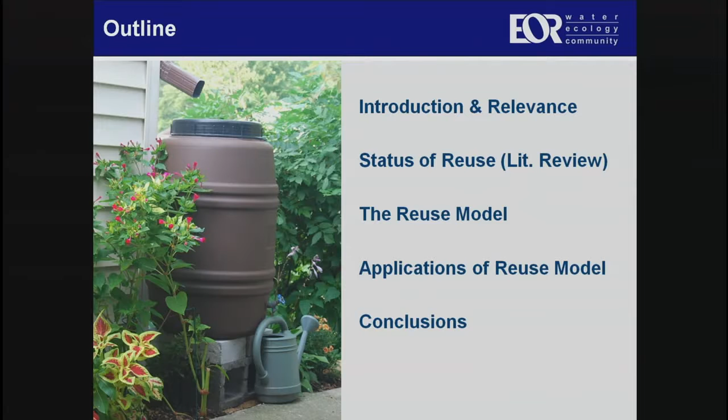Another part of that research grant was to develop the actual model, the tool, a spreadsheet model. It's kind of a lower end model, high end tool, I guess you could consider it. And then also look at some applications, both within the grant - we did some specific test sites just to check. Basically it was a way for us to debug and make sure the model is working as we want it to, plus to get some trends and ideas of what things work and what are some of the pressure points when you're trying to design a reuse system.

And then since then we have a couple other examples of actual projects that we've applied it to. And then some concluding remarks, and we should have plenty of time for questions.

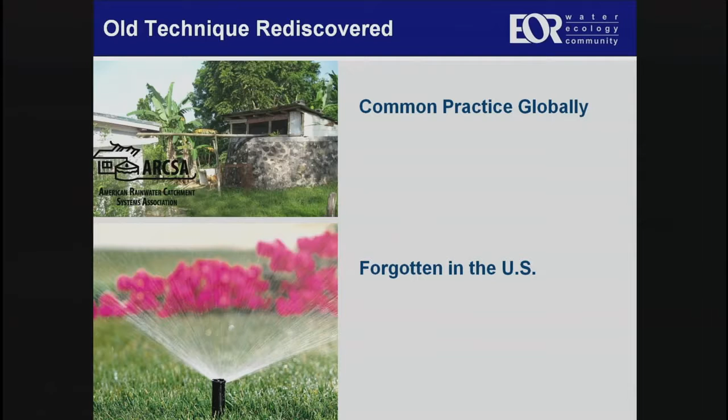So I think what's interesting to me, and worth noting, is this is somewhat of an old technique. If you've traveled internationally or been in any third world area, you'll realize that stormwater reuse is pretty prevalent, oftentimes a primary water source. So I'd look at it as an old technique rediscovered. A lot of the old farmhouses had rain barrels by their downspouts—they would conserve water. I think that's kind of interesting.

We've gotten to the point now where we've developed this potable water system that's relatively affordable, and we've reached this easy water at hand that we spend a lot of effort pumping out of the river or ground, treating it, piping it across town, putting it up into a water tower, and redistributing it. A lot of times it just ends up on our lawns or washing a car. The pendulum has swung so far to one side that we've forgotten we have other ways to access water—we've just turned to the idea that we've got this clean, high-quality potable water, so let's use that for everything. I think we're starting to step back and say maybe that's not the best way to handle our stormwater, both for the negatives and the positives of that water.

The other thing that excites me, and I think is very relevant especially today, is this convergence of a couple issues. First, stormwater standards are evolving—they're much more focused on the quantity, the volume of runoff, not just the rate of runoff. Old standards were often about just ramping down the rate, maybe with a wet pond where water could settle out some solids. Now our thinking on stormwater has evolved to realize that all that excess water created as we change land uses has its own impact—it carries pollutants plus more power and damage to our systems. So a lot of the new stormwater standards are looking more at volume control, not just rate control or the water quality ponds of the past.

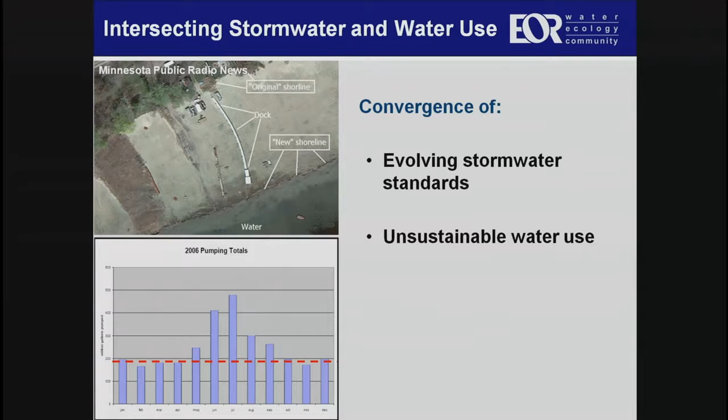And the predictions are, with some of the regional modeling that's been done, if we just keep along this path of continuing to pump so much groundwater and emphasizing groundwater withdrawals for potable water sources, we're on a trajectory where we're going to have some pretty severe shortages and problems show up. So part of the brainchild of this whole approach was to say, where can we irrigate with stormwater so that we're diminishing our potable water use, plus taking that water that would have normally run off downstream and been expensive to treat, and instead keeping it more at the source where it can have a dual benefit. That's the simple approach to it.

So I wanted to stop briefly and talk about what was the driver behind this and us pushing to get this research grant. It was this idea that these new volume control standards are coming online, which is a very important new approach, but there are sites that are difficult—if you have tight soils, contaminated soils, or shallow bedrock, doing volume control can be fairly challenging. What we're finding is this is actually a new tool in that stormwater toolbox. If you can use reuse, that's another way of taking stormwater out of the budget, even if you don't have infiltration as your primary way of handling the water.

So I think that's a need for the tool. Similar to talking to Cliff Aichinger before, the thing we were running into is we have some communities like Inver Grove Heights, a community we work with that has very aggressive low impact design standards—a very high bar set in terms of what kind of volume control has to be met for every new development that goes in. And we started having people come to us and say, buying our irrigation water is getting to be very expensive. What if we want to use some of our stormwater for irrigation? We want to use that as our BMP for all these high stormwater standards you have.

And our first reaction was, well, that sounds great. Yeah, I think that's a good idea, that sounds valid. But as we got back to the office and debated it, we could come up with all these scenarios of, well, we just had a rain, so how much water really gets used up in this? There's this idea that it's going to vary through time, and there are some limitations to the system—it's not infinite, even though it's good in concept. It also has its limitations in how you would actually apply it.

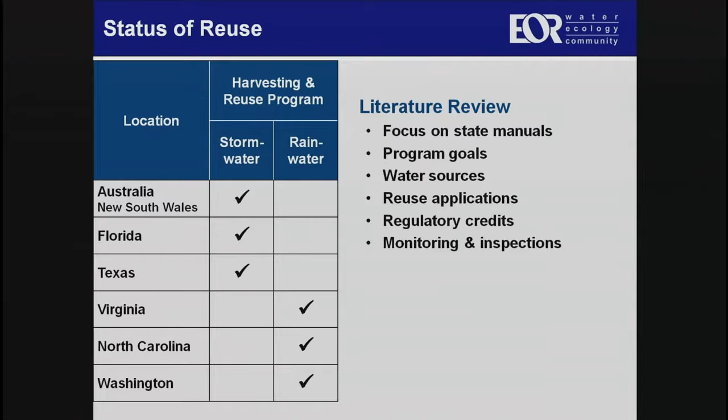What we found, at least in 2011, is there weren't too many regulatory programs. Virginia and North Carolina had some sort of volume-based credits. Virginia and Florida even looked towards the nutrient benefits of reusing stormwater and the phosphorus reduction. Some other states, like Texas, gave financial incentives but didn't have a credit program in place. In Washington, similar to Minnesota, reuse is part of their BMP toolbox, so there isn't any well-defined regulatory credit system yet.

That's an area that's constantly developing, and Minnesota can really play a key role in the national scene. The last thing was operation, maintenance, monitoring, and inspection. Now we're getting into public health risks of taking stormwater that might be contaminated with metals, nutrients, bacteria, and applying it to a public space.

We were looking to see what other states have done in terms of how often you have to monitor water quality in these systems and how often you inspect them. I'll talk about this later, but really the leader in this field is Australia, and they have quite a lengthy document. A future project in Minnesota could apply that more into a cold climate stormwater management system, instead of their more water-conservation-focused arid climate approach.

Other things we looked at, giving us background information on how to develop the reuse tool and model we built, were things we were interested in. Climate is changing, precipitation patterns are changing in the summer. One issue with a reuse system is whether your rainfall event matches with your reuse. If you just use an annual precipitation amount, that's great, but maybe you're capturing all this rainwater and it's all going to overflow because when you need it, it's not in your storage system. So we were just looking at what the precipitation timing is.

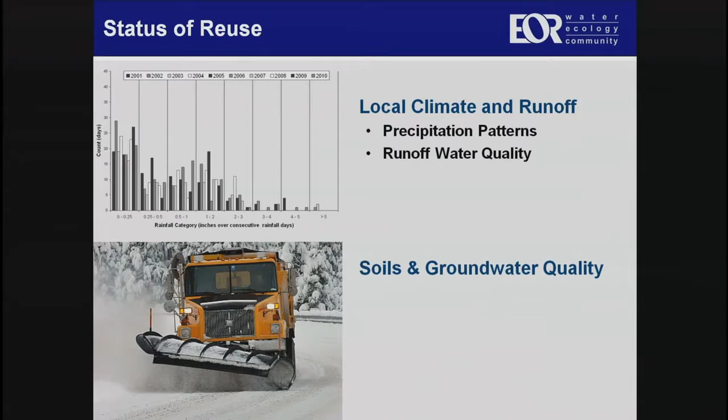Along the lines of water quality, since the goal is trying to put as much water on the landscape as you can, if it has poor water quality, what is the effect on soils and groundwater quality? In this part of the report we looked more specifically at the academic research. There's a lot on the East Coast looking at this, actually testing stormwater BMPs with high salt runoff and high nutrient runoff, and measuring concentrations in the groundwater table and also in the soils. Interestingly, there's retention in soils like you'd expect, and it is transported to the groundwater, but there were surprising results in that some systems had nutrients and contaminants flush away more quickly than expected. That's an area of research that is evolving and should be looked at again in the future to see what they're coming out with.

Another component we were looking at: given this, how much water can we put on the landscape? There are a lot of irrigation rules of thumb for how much water you should put on turf grasses based on water conservation, minimizing how little water you use. But since we're looking at this for stormwater management, we wanted to go the other end of the spectrum - what's the most you can put on without drowning your plants or causing lethal toxicities of metals and nutrients. So we looked at what's out there in terms of what plant and tree species are most tolerant to water logging and salt tolerance.

Something interesting research we found: there was a study that looked at 800 trees and shrubs and gave a relative ranking of water logging tolerance. That's included in the report with a citation for that, but it'd be interesting if people want to look at that.

Red maple, tamaracks, and silver maples popped up as what I would think are more common species here as being waterlogging tolerant, and then some of the turf grass cultivars are very waterlogging tolerant, like ryegrass and Kentucky bluegrass.

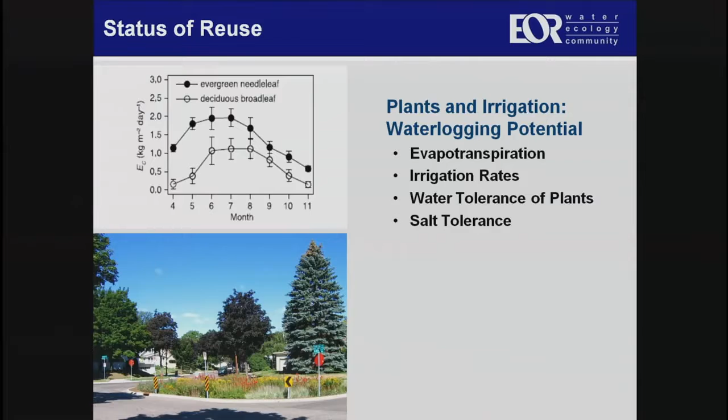And then a 2008 version of the Minnesota Stormwater Manual has pollutant tolerance of tree and plant species. So that's something, if you're looking at this in terms of what plants you might want to put in a reuse site if you're going to use captured stormwater for irrigation. And that was the focus of our study, this irrigation reuse.

That's a good source. And there's things that popped up with a high pollutant tolerance were poplars, sumacs, little blue stem. There's some MnDOT urban prairie seed mix, which makes sense, having a diverse set of plant species were tolerant.

And then the last thing, in terms of just the background information we were looking for, was this health and environmental risks. So how are people addressing high levels of bacteria that may be present in your stormwater and then applying it to a baseball or a soccer field or something where there'd be contact with humans.

And I mentioned Australia really had, I felt, the most developed kind of risk assessment framework for addressing this. And again, showed the cover. It's a long name of the document, but it's in our report, so you could find it again. It's this Australian Guidelines for Water Recycling. And they have managing health and environmental risks, with a phase 1 and a phase 2. They're very long documents, but the phase 2 is particular to stormwater harvesting and reuse.

And so on the right, I was just giving an example. The whole document is set up in terms of, you go through this checklist of things to look for in terms of managing the risks. And that's kind of how the whole document's set up.

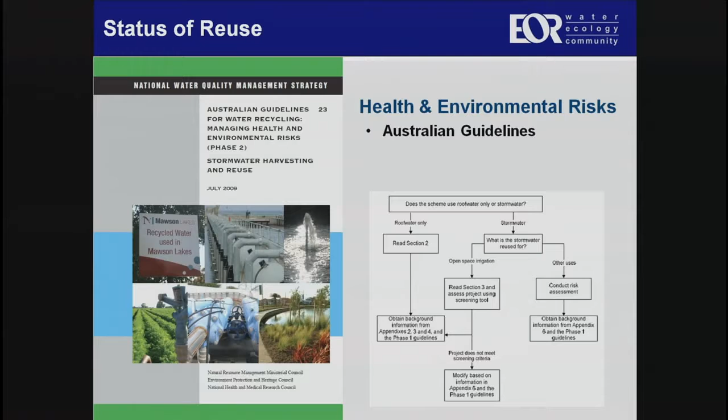It's great just to have a discussion, so this is great.

Okay, next I'll move into - since we knew we wanted to develop our own tool, we were looking at what was out there already. One, if there was a great tool, we didn't need to remake one, but also what were the pros and cons of each one, and what could we glean from each of the tools that are already out there. So I'll go through quickly some of these tools.

You could look them up, everything's available on the web, you could Google it. Florida has these stormwater rate efficiency volume curves. I was intrigued when I saw these because everything is normalized to an equivalent impervious area. So essentially their whole tool is developing the figure that you see on the screen. What this shows, on the bottom axis, is runoff volume of water - that's your watershed runoff.

This is inches over your equivalent impervious area, so it can be used on any site. The y-axis is your use rate, or reuse rate, of collected stormwater. The different lines represent the efficiency you're aiming for. So if you wanted to use 90% of collected stormwater, what rate of reuse would you need to collect all the runoff in your basin?

That was interesting. I liked the visual nature of it, that it's one figure you could use. But some disadvantages when we tried to apply it to Minnesota: it used an average runoff coefficient, so it's hard to use across different event sizes and different sites. It also depends on a supplementary source of water to maintain water in your pond.

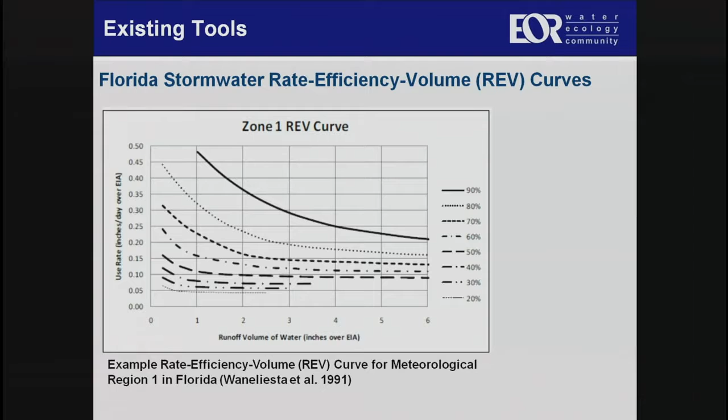So it doesn't look at any annual dynamics. This would just be a very broad, cursory tool for general sizing of the stormwater collection system you need to store stormwater before you can reuse it. But that's one of the tools out there.

If it's paused, maybe I need to press the button. Uh-oh, do I have to press it again? Oh, I see it turned off, so it must have been on. Okay, this works just as well. I'm going to move over a little bit.

The next one was out of Virginia. Now we're getting more into examples of spreadsheet-based and design tools. This one, of course you can't see anything, I apologize, but it's more for sizing cisterns for harvesting rainwater. This gets more at the storage component, not necessarily the reuse component, but actually it does factor in your reuse.

The box on the left is your inputs into this spreadsheet. It's an Excel spreadsheet, anybody can download this from the internet. You put in what location you are within Virginia, your roof area. This is roof water focused.

You answer different questions about how big your irrigation area is, how often you're going to irrigate, things like that. It also goes through uses like toilet flushing and helps you calculate those. On the right, it goes through the different storm events. It has some rainfall data it's using as assumptions and gives these little figures. The goal is to help calculate runoff reduction credit for their program in particular.

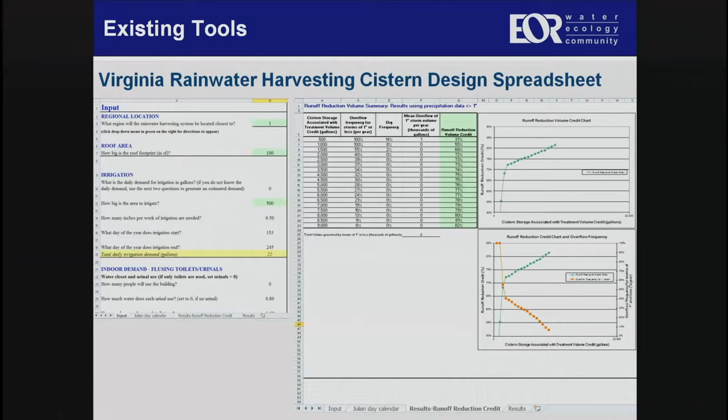The next one was out of California, and this tool was actually similar. I saw Carolina and thought California in my head. Thank you, Brett, that's why there's two of us here. North Carolina, and this one was actually a Windows-based program.

It's based on a similar spreadsheet type system where they have system design, so you can specify your rooftop area. This is focused on rooftop rainwater harvesting. It has some cost benefits in it, which was nice, so what is your cost of water, and sewered water, and the cost of a cistern, so you can get at how much money you're saving by reusing rainwater versus using potable water.

On another screen, what was nice is you can get more specific on your irrigation, so you can have different irrigation rates by month. I think you might even be able to get more specific than that. You can have this custom design with different water uses you can put in.

The output then just gives this total annual water savings, and it's very much focused on how much money you save. They have, I think, a nitrogen component, how much nitrogen is removed by harvesting that. But that's not as much a concern in Minnesota as phosphorus is.

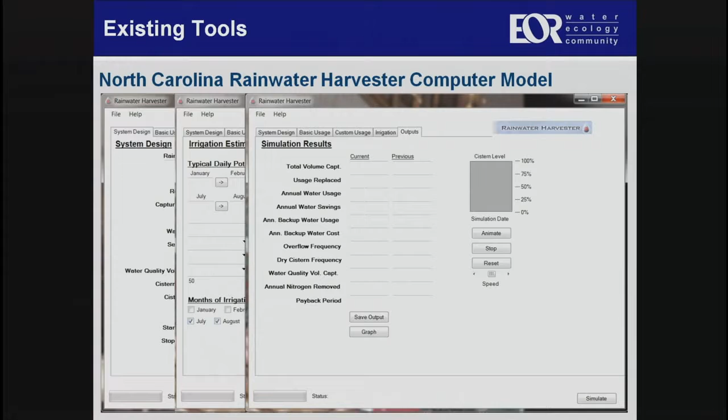So this system, you import a rainfall file, so you could make your own rainfall file and import it for Minnesota. They have some standard ones for North Carolina, so that was interesting, and they have that cost benefit. But it's a little hard to modify since it's a Windows-based program.

So that's a program that's out there. And then I started looking too in the academic community and trying to get at this question of this variable rainfall and when do these events happen, how frequent and how large your rainfall events are with the timing you need for irrigation. And so I ran across another kind of spreadsheet-based model, and it has a fancy name, Stochastic Reliability Estimation Tool.

Some university out east developed it, I didn't write it down. But the interesting thing is they kind of predict in the future what your precipitation might be based on past data, and they look at bootstrapping and all sorts of statistical estimation of rainfall. That would help you get at, you could put in the 2010 rainfall data and size your system appropriately for that year, but then using some sort of statistical prediction of rainfall, you might be able to get a more...

I'm not articulating that very clearly. But again, it's very complicated, and we couldn't incorporate something like that into our tool. But that's something that's out there. People are thinking about it.

This didn't work. Show this over here.

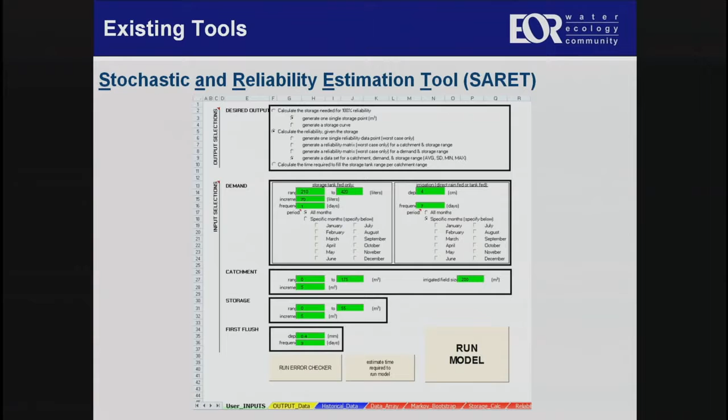But this one, the key components are more on your stormwater pond or cistern, how often is it empty. It's more on the efficiency, how much of your harvested stormwater can you reuse. So they have outputs like it's empty so many weeks of the year and things like that. It's more of a water balance tool and doesn't get into the water quality component, but that's out there as well.

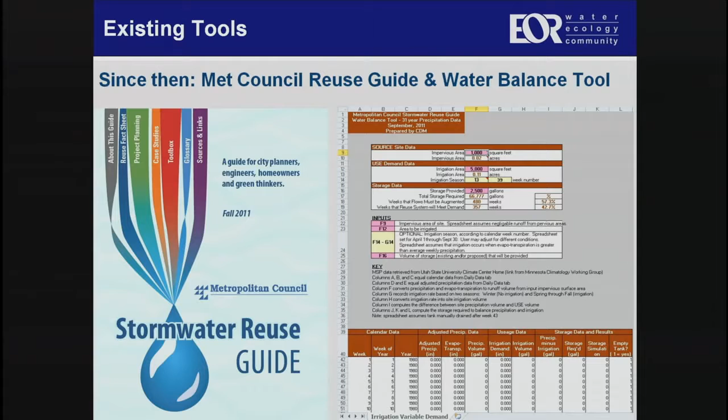And then, like I said, the minute you complete something, a new document or manual comes out. So EPA has this 2012 reuse guidelines that we never ended up looking at for this project, but that's out there. I think it summarizes a lot of the same things I've just told you about that are in all these other program manuals.

Okay, so let's get to the reuse model that we developed. We looked at all these previous tools and set out with what things we were interested in. What we wanted to build was a relatively simple design tool. We wanted anybody in this room to open it and have some sort of intuitive sense of how you might use it. Some of these tools and models are kind of complicated, but we liked the features of the ones that were more simple.

And then we wanted to be able to incorporate this timing of rainfall. So our model is based on actual precipitation data from the Minneapolis airport. We picked out 3 representative years, a dry, average, and wet year from the most recent data, which ended up being 2007, 2009, and 2011. We run it on a daily basis, and all of the components of the model are based on every individual day, calculating and looking at that rainfall.

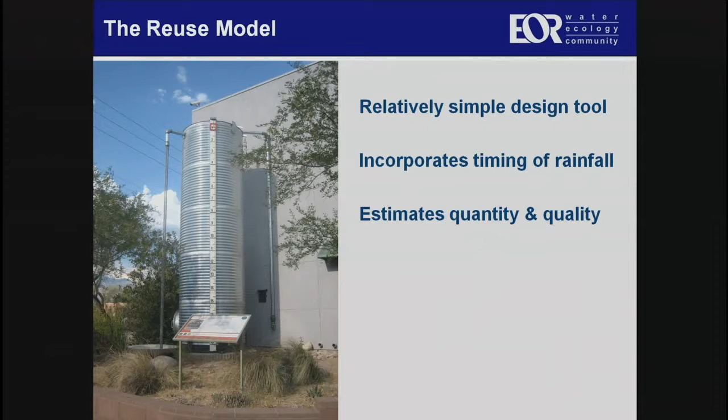It didn't like that. Maybe it's because I'm holding this. You just turned it off? Oh no, okay. Anyway, looking at previous rainfall, things like that.

And then what we thought was really new and unique about our tool is that we're incorporating these nutrient benefits, phosphorus in particular. There's a lot of phosphorus in our stormwater. We spend a lot of money trying to mitigate lakes that are too eutrophic, reducing phosphorus in our stormwater. So by collecting stormwater and reusing it for irrigation, we can put those nutrients on the landscape to be taken up by plants and soils. So what are the benefits we can get from that?

And then also there's an interesting side benefit of the fact that we have to store stormwater in some sort of pond or cistern, and we get sedimentation out of the water column of our particulate bound phosphorus as well. So we tried to incorporate some very general stormwater phosphorus sedimentation equations and a phosphorus mass balance into this tool, so that we can not only quantify the volume reduction benefits, but also phosphorus, which we're also very concerned with for stormwater.

And that's why I helped out on the tool, if you're wondering why. A scientist is on this project and not our engineers.

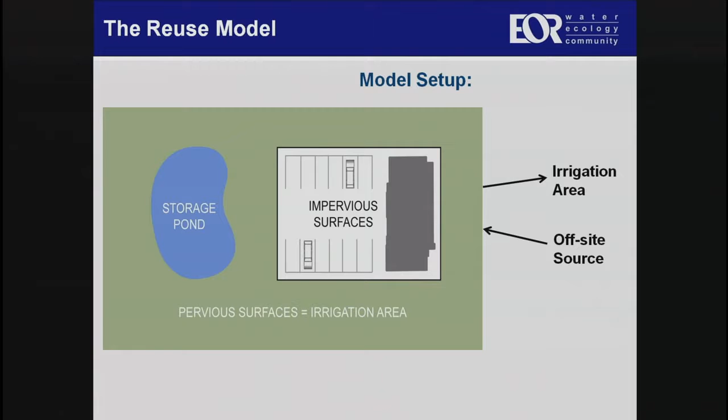And then we have all of our inputs in terms of irrigation area and where your watershed runoff is being generated kept separate, so you could use the model and assume everything's kind of insulated, meaning your watershed is generated from the same site that you're irrigating on. But also you could separate it if you're in a very urban, ultra-urban location. Maybe you're capturing stormwater somewhere else or from your site, but then piping it somewhere that needs more irrigation water, but they're actually hydrologically disconnected.

So the water budget, and this is the same in every tool we've come across, nothing new: you have your watershed runoff flow coming in, some sort of size of your basin with a maximum set, a variable storage component, and a sediment storage volume that you wouldn't actively pump below, so you have some standing volume for your phosphorus to sediment out. It can evaporate below that level, we can't prevent that. Then you have evaporation from the pond surface if it's a pond storage system, and an overflow component if, in big rain events, you exceed your storage size. And then, of course, what we visualized as our main output was this irrigation component.

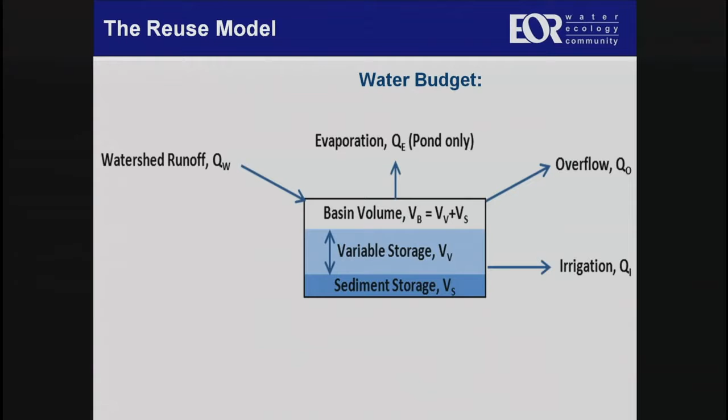The other portion then is a phosphorus mass balance that corresponds with the water balance. So we have our watershed load coming in, based on event mean concentrations of phosphorus in our rainfall events, which you can set as an input. We account for mixing residence time of the pond system. If you get back-to-back rainfall events, you're going to have much less sedimentation of your phosphorus, and more of it's just going to flush right out of your system, so we try to account for that. Eventually your sedimentation component is just what fraction of your phosphorus is sedimented out based on residence time and the size of your basin.

And so then you can have sediment storage, and again you have overflow. Some of it's just dissolved in your overflow, and you can keep track of that, and then how much is actually going onto your irrigation lawn.

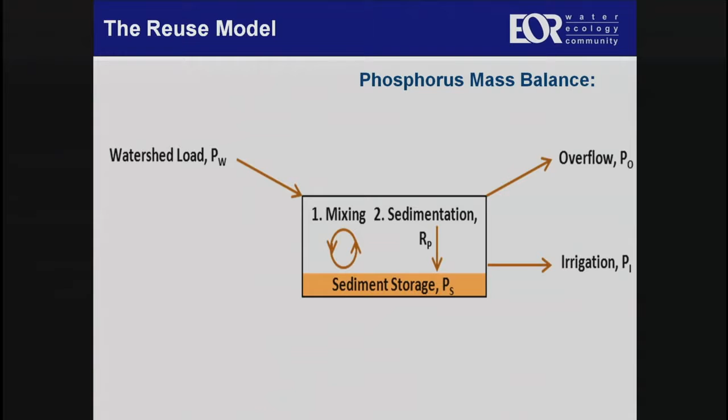So first you would start with your irrigation, and what is the area, what sort of lawn do you have that you can irrigate, however many square feet. And then how intensively do you want to irrigate? A rule of thumb for water conservation is 1.5 inches of irrigation per week for turf grass, and we assume you're going to irrigate every other day. These are just following these rules of thumb, and that's how our model is developed. So 1.5 inches per week at every other day is 1/2 inch, and that would be your input. You can change that in the model.

So maybe you want to get really aggressive and do 1 inch every other day and see how much we can put on. Maybe you have A soils, and it's just going to infiltrate really quickly. And then you can set, we have a finite growing season, so you can start your irrigation in May and end in September.

Some models can do it by day, I have it by month. We're always looking for what's the next version, something we could add. I was just realizing today that maybe you could have it more specific if you wanted to start on May 15th versus May 1st in terms of irrigation, which could make a big difference.

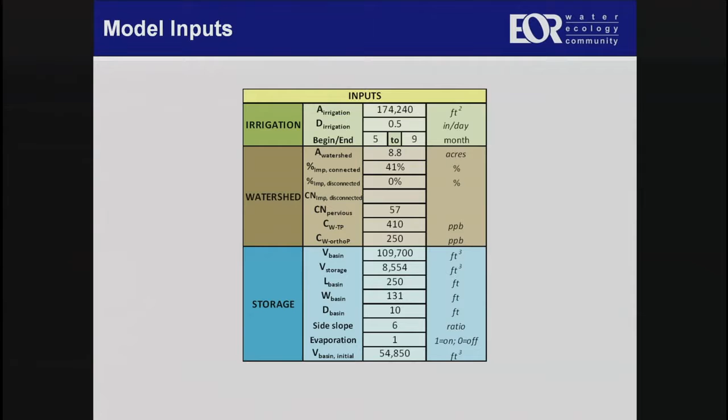To switch between a cistern and a pond in the model, you're essentially just turning evaporation on and off with a 1 or a 0. And then you set some sort of initial size of your basin. Our model runs one calendar year at a time, so you'd have to have some sort of starting volume. That might let you account for some snowmelt dynamics - if you know it's going to fill up from snowmelt, you'd start it full, or if you think it's going to be empty, you can start it empty.

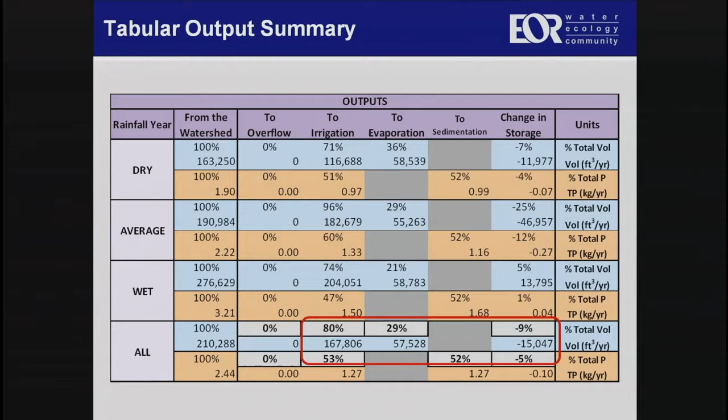So that's the summary screen, and that's also shown in the output as a bar graph so you can compare between the different years and the different sources. In each figure, the top one is in terms of volume and mass, and the bottom is a percent of the watershed total. Each of the colors is a different source.

The white in each one is a change in storage, you have evaporation in purple, irrigation in green, and sedimentation in orange. If you notice in these figures, this is a system that started empty and ended up full, so some of your totals are just being stored in the pond - that's why you get this kind of negative value. So it has the capability to let you know what's happening in your cistern or storage pond throughout that year.

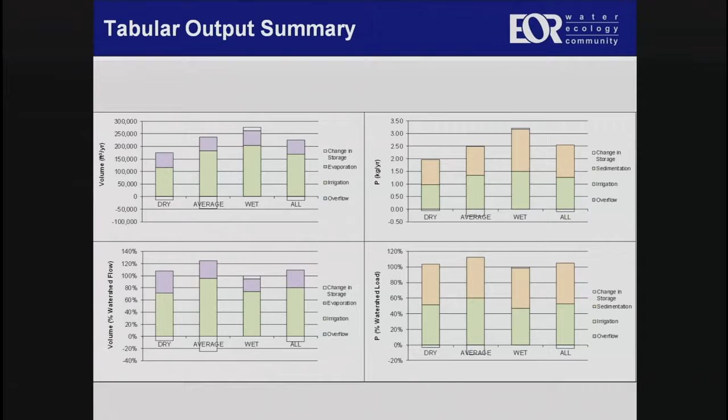You need to maintain some volume that looks like you have a pond there. So in terms of your rainfall and how you want to size it, we have these annual figures to show you the water level dynamics in the pond. What I'm showing here is on the x-axis of all these figures, it's the date, January 1st to December 31st. On the y-axis is the volume within your basin.

And the blue line shows you the total volume you have. There's a solid line at the top showing you relative to the maximum volume of your pond or cistern. And there's a dashed line near the bottom that is your sediment storage volume.

So you see that in this case, I think this example didn't have much watershed runoff. So we see we're losing volume through the year because we're not getting enough inputs. And the minute we start using the water for irrigation, we're emptying our pond and not getting refilled. So if you saw this system, maybe the pond's too big.

And then you can see that due to evaporation, we're going below that sediment storage volume, so that could have some consequences for the phosphorus component of this system.

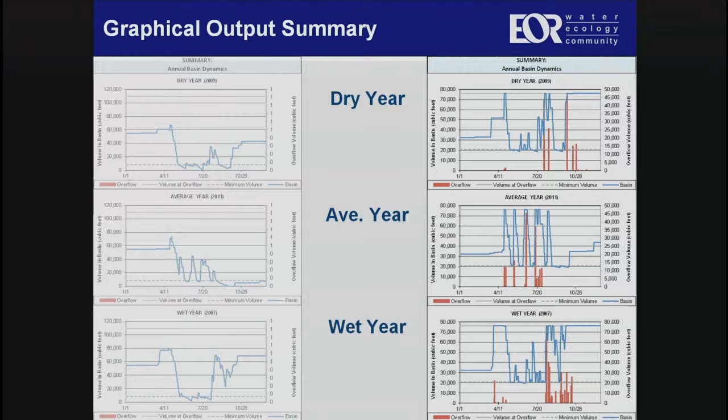So that was kind of our hope with some of these figures, is that it could be useful as a design tool, that you can make those decisions, and we're not making any assumptions for the person who's actually doing the designing. So this is actually the whole input-output spreadsheet in the model, and you can kind of see that they're all just kind of clumped together.

And with that, I'll pass it back to Brett, who'll go through some examples and talk about how this has worked.

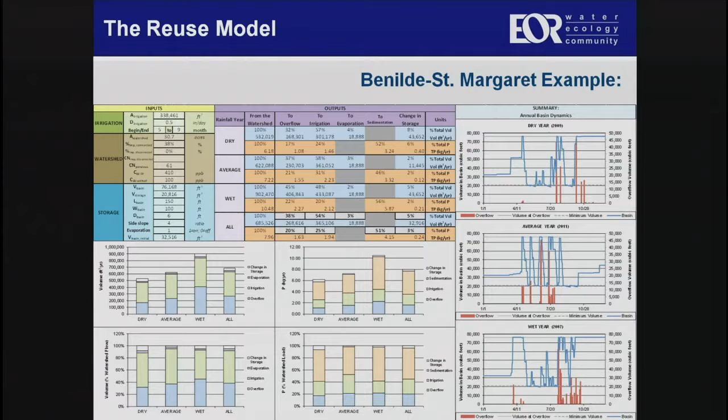As you can see, there was a lot of background to go in there, and thanks to Megan for doing a nice job of thinking of all those pieces. Particularly, I thought the accounting for evaporation, I kind of felt like, well, that seems like overkill. It's a small thing, but I'm glad we did, because as we got into it and looked at it, it can be up in that 15-20%. So it is enough of a variable in certain conditions that I'm glad that we had it accounted for.

So I guess at this point, I was going to change over and just talk about, as part of this original project, we had kind of 7 or 8 sites that we wanted to run the tool on. So I'm going to walk you through one of those sites, just to see how the tool was set up and how we saw it run and what kind of results you get off of a given site.

This was somewhat urban focused. One of our sites, though, was very suburban, a proposed new development. We had Ross Bittner on our technical advisory committee. He had a site, before he moved up here more in the metro area, or in the inner city, he was more in a suburban community, and he had given us a site that had been proposing to use. They had some very high standards to protect the lake, so they wanted to use reuse, and he talked about how much difficulty they had in terms of trying to come up with this kind of approach. He said this is the kind of tool that designers really need, because it really gets us at the point where everyone's comfortable.

This is what they're actually going to get as far as a performance out of their system. So I'll take you through these 8 sites kind of quickly, and then I'll cover 2 other sites that have been designed and built, or in the process of being built, based on this.

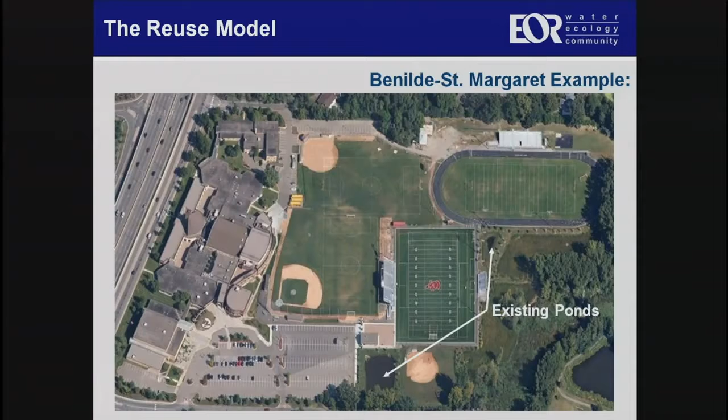I'd say they're fairly undersized by current standards, but at some point in the history they put in some little stormwater ponds. So we just said, well, what if you just took the existing stormwater ponds and at least added this reuse part to it without doing anything else? But obviously, if you wanted to go further, you could look at trying to expand the basins.

Through our exercise we have to categorize all those different coverage types. The basins are that striped blue. There are impervious surfaces that are designated, both the rooftop and the parking lot.

Then there are pervious areas where we're going to irrigate, that kind of green speckled. And then the main football field on this campus is actually artificial turf, so it's going to generate runoff, but it's not one of our irrigation areas.

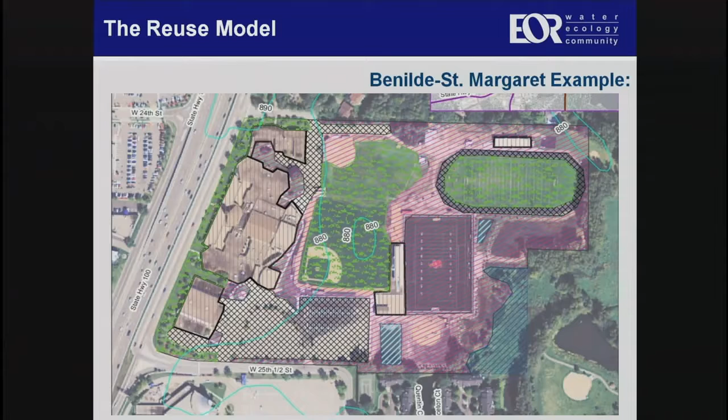Again, as we went through this, we could have gone off-site further to the east into this park area, but we didn't really go down that path, just for testing the model, to see what kind of results we got. But that's an intriguing idea as we went through this.

So the output of the model was, to us, fairly interesting. I'm trying to see if I have one more slide on this, or yeah. So I'll also go through that kind of graph.

If you just look at the inputs here, you can see we had our irrigation area, the green speckled areas. The percent impervious was 38%, sorry, impervious. Otherwise, fairly standard types of assumptions.

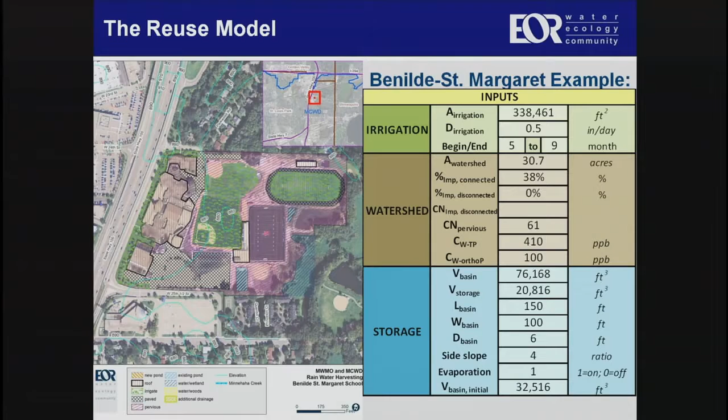This is what an average year looked like. We've obviously run all of them, but this was just to give a representation. You can see here the overflow is that kind of darker gray at the top. The blue line is the water coming into the system, and those red bars represent the overflow water that came out of the system.

So we started at about a third full, came up, and as that blue line hits the upper overflow point, that's where you can start to see runoff generated. So I guess as a designer, in an average year, I might say I probably haven't pushed the system as far as I could. I'm definitely getting discharge out of it.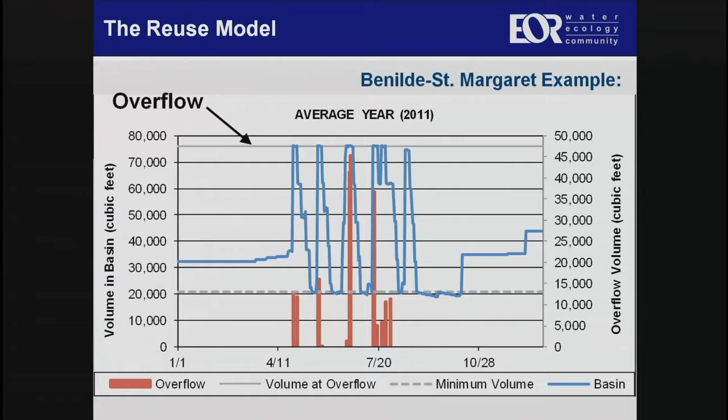Then I might start doing that kind of cost-benefit analysis: well, I could add some more storage here and actually reduce all those overflows, reduce them in half or eliminate them altogether. But in this case, we were just looking at this particular site and given the storage that was already handed to us at the beginning of the project. So that's kind of encouraging, that this is not any additional cost for the storage in this particular case.

These are the kind of opportunities we think are out there, a lot of them. So using this as an example, it's 31 acres, 38% impervious, so fairly impervious, not ultra-urban by any means, but still a fairly impervious, urban site.

For treatment reductions, we estimated that if you had just used a typical sedimentation pond for this, for the phosphorus, you probably would have gotten a 50% reduction, and the volume of runoff maybe a 3% reduction just from that evaporation. These particular ponds are fairly small, not a big area. Whereas by adding the reuse to the system, we were able to get an 80% reduction on phosphorus throughout the average year and a 62% reduction in volume, which actually was better than I somewhat expected for this site.

Because not all the site had areas we could irrigate, but there were enough areas that we could irrigate that we could use up a fair amount of the water. So I thought that was probably one of the better scenarios of taking an urban site and still being able to get some efficiency out of it by adding that component.

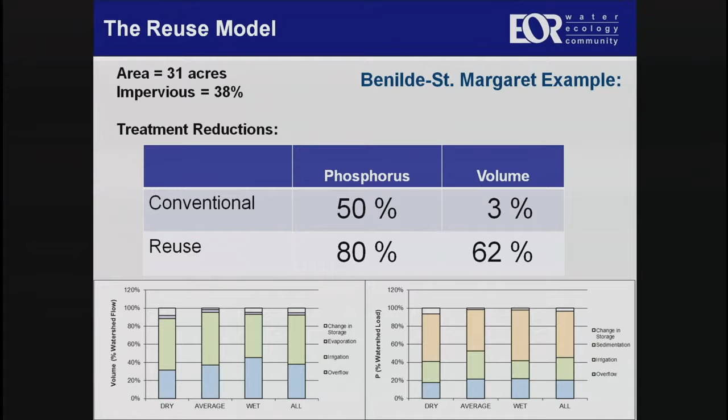Cliff asked: in that case, was the distribution system already in place? No, it's not. Just the ponds exist, and they had green space. So the development would need to anticipate this and factor in the cost of adding the distribution system, the pumping system, the regulatory control, and the ponds.

Correct. And taking this one step further, depending on where the ponds are, there are definitely sites where ponds are kind of in the back area where no one really sees them, so you can pump them fairly aggressively. If there's a spot they feel is very high profile and worried about aesthetics, you'd probably temper how much you're going to pump. You'd pump it down to a certain spot and stop there, maybe put your sediment storage higher so you're not draining it all the way to the bottom—those kind of parameters.

Can that account for a smaller pumping volume? Yep.

So I think that was encouraging. Here's the whole range of different scenarios—basically dry, average, and wet years, three different types of years with different total volumes, but you can also see the distribution of storms was different through each one. We averaged that together to get the numbers shown on the overall system. This helps you look at your system in a wet year to see if it's vulnerable, or in a dry year, where maybe you're underutilizing it.

As we looked at these various sites, we felt like there are some sites where we're underutilizing what we have, and other sites where, if we had the ability, we'd come in and change the storage or find more irrigation area to try to make it work a little better.

One of the things we did as part of the project was take an example template—not a particular site, but more a hypothetical example—and run a bunch of scenarios to see what kind of feedback loop we were creating with the model. This was interesting: here we're looking at three graphs.

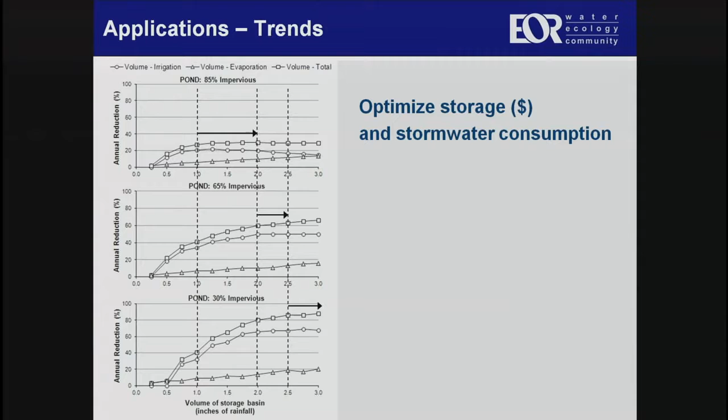So just kind of the storage piece of this. The next thing we'll talk about is the hand-in-glove relationship of how much storage you're trying to create, but also what's the green space that this is going to go to, because that's the other really constraining factor. I guess that was the other bigger aha that we didn't totally realize on these very urban sites: green space becomes one of your real constraining factors too. You have to have green space for this to go to.

So the same thing occurs here where, again, we kept the sites fairly self-contained. When we say it's 85% impervious, that means there's 15% pervious to irrigate. So you can look at getting maybe a 30% volume reduction, a little bit less than 30%, on these highly impervious sites, and then you're capping out.

If you go to a 65% impervious site, you give yourself more irrigation green space to go to. Now you might be able to get up to somewhere around 60% volume reduction. And if you go to more like a 30% impervious site, you could be as much as 90% volume reduction if you really maximize your system with enough green space.

And as we saw with some of our examples, the obvious question becomes: well, in those highly impervious sites, like Megan was referring to, do you have an adjacent park? Do you have some adjacent green space where your site could be tied into for an overall benefit? So it's a very important point in this kind of balancing act you're trying to do when trying to reuse stormwater.

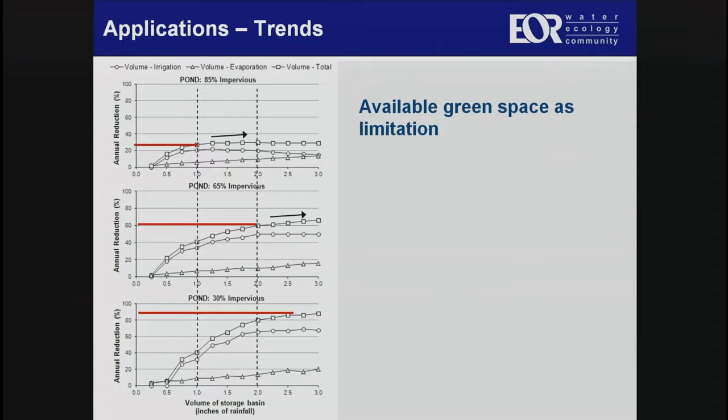And this is now taking a look at the phosphorus side of that. When we ran all these different scenarios, what did we find? Well, on that highly impervious site, 85% impervious, phosphorus is going to cap out not too much above what a typical pond would, about 60%. Maybe your pond would be about 50-55%. So very similar phosphorus benefits in this case on a highly impervious site.

Whereas you go to a 65% impervious site, now we jump up quite a bit. Your phosphorus reduction could be slightly over 80% as your maximum plateau. And again, a typical sedimentation pond is going to be more in that 50 to 60% range.

And then in a 30% impervious watershed, if you really maximize your system, you could get upwards of almost 95% phosphorus reduction out of that. So if you're comparing that to a conventional stormwater pond, these start to become pretty impressive numbers, because that typically plateaus in the 50 to 60% range, and after that, you're done.

And implied in this, which is also interesting, is that if you have dissolved phosphorus, that's why ponds tend to plateau. Most of the phosphorus you can get is attached to sediment, and after that, the rest just gets flushed downstream. If you're in a reuse system, you're actually able to target that soluble phosphorus, and treat it through a reuse approach, which allows you to break through that threshold and go all the way up to pretty high removals.

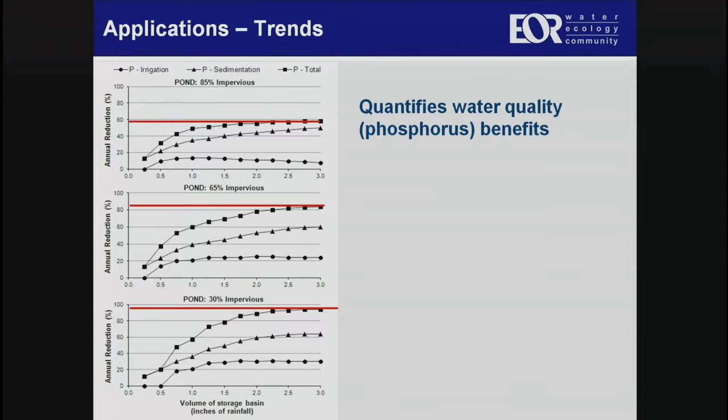Obviously, these are on the order of 2 to 3 inches of runoff for your site, so that is a bigger size system, but that's kind of where we wanted to push the system and see where these plateau points, these diminishing return points, are.

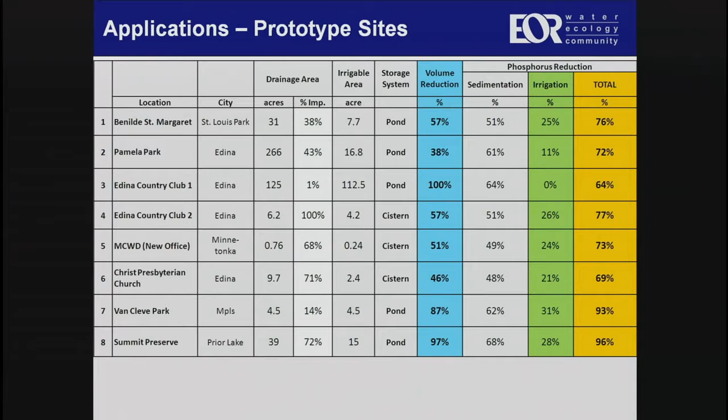So it gave us a chance to try the tool and see how this works, and to find some sites where more green space would really help. Even the Minnehaha Creek office site is an example where what's really constraining the site is probably more the access to green space than anything. If we talked about the nursery or some other adjacent properties, maybe you'd find a partnership to move that up another step. We also found sites where it was all green space and we didn't have enough water—kind of the reverse situation.

So just quickly, two sites where we've applied this. One is a school site in Waconia, Minnesota. The idea was there's a drainage area with concerns—the city wants to redo the streets and add more storm sewer to manage stormwater better. It informally runs down, picks up some of the school parking lot, and heads down through an overland route to Burandt Lake, which has a TMDL on it. So Carver County was interested in working with the city of Waconia and the school district to try one of these reuse projects on this site. We used the tool to start coming up with preliminary sizing and trade-offs. They had some budget restrictions for this first phase, but we were able to give them an idea of the performance for different storage sizes.

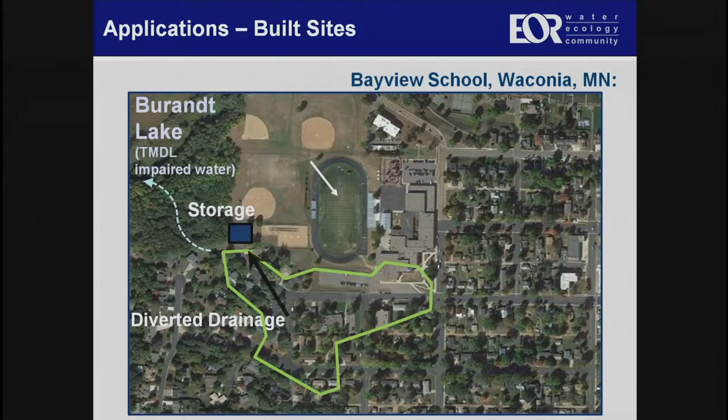Given the lay of the land and site constraints, this was more of a cistern situation. So we were going to divert that drainage and bring it down to a storage unit tucked in the corner at the end of a dead end, next to some ball fields. That would then be brought over to irrigate the football field.

One of the interesting things was not just being able to quantify this and give real numbers—how much water you're going to get, how often you'll run out of water, and how much phosphorus you'll reduce—in a very tangible way. What was also fun and exciting was dealing with the grounds people at the school district, because they were ecstatic about this idea, and I was kind of like, really, you want to cooperate with this?

We're like, well, yeah, water's very expensive for us, and we tend to not put as much water on our football field as we'd like. There are times I get prodded by people that it's kind of getting brown. And if you could give us water that doesn't cost us an arm and a leg like the city water does, we're all for this. This is the greatest thing since sliced bread. I was like, wow, that's nice to hear that kind of message. I've now run across that a couple times with different developers saying it's becoming expensive to buy water for irrigation, so that's a big deterrent.

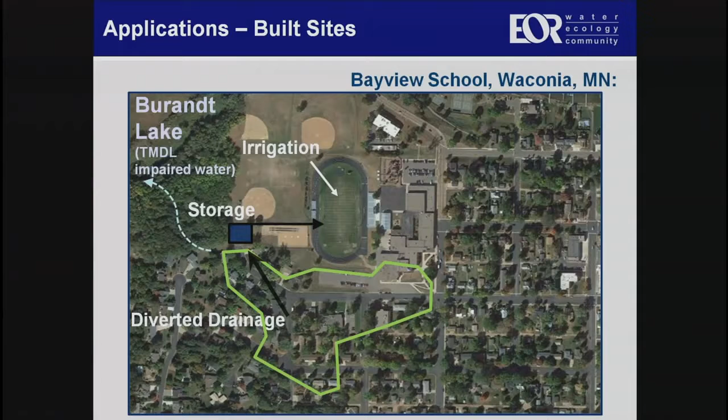They're also starting to see all the press articles about the bad rap that irrigation water is getting, and they're saying, if you can give us another water source where I can diminish my irrigation, I may not take zero water off the system, but I can diminish that with a system like this, I see a big benefit to that alone. And then if you can tell me that I'm meeting my stormwater standard and these new standards, I'm getting a benefit there too, there's actually some interest in that. So that was a very fun experience, having the folks excited to try to reuse this water.

I don't know, do you want to add anything else before I move on to this last site, the Carver County folks? Okay.

Good, I didn't. Quick question. City sell water, school district is kind of governed by, do you get that resistance where we want to conserve water, but that's a source of revenue? Does that come up? Or did that come up in this case? Did not really come up in this case.

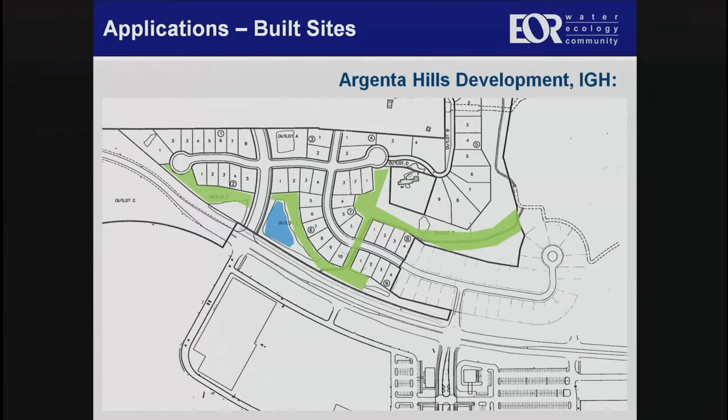Cliff? So those would be developing, you typically wouldn't irrigate those. In this case, we started out with road right-of-way, which you would possibly irrigate, and then we ended up changing over. They decided they didn't want to get in with the county roads, so they ended up coming into kind of passive open space areas. So in this case, they would provide a distribution system strictly to get rid of it. Yeah, that's probably how it's going to work—more of a passive area.

What about areas—here's the issue we're running into. We start to talk to utilities folks, and in many cases they're going to want a redundant supply. They're going to be efficient here, but you can't have two systems tied together because now you're going to have cross-contamination. Even with an RPZ, you pressurize on both ends of it, so you have to run a redundant system. How are you addressing that? Are you finding pushback on, well, that's a lot of extra cost to run a second irrigation system?

Well, I think the sites we've looked at—you're right, if it's a highly visible, highly irrigation-dependent landscape you've designed in, you might not want to just have this stormwater as your sole source, because we're not really hoarding it. We want to get it out there and back into the soil as soon as we can once the storm has passed. But what we would say is you may want to add an extra source onto your reservoir—a potable water system that comes in and adds to your reservoir, separate from all the stormwater that comes into it. So you'd have the stormwater source and a potable water source, and the irrigation draws off of that source. That's the way we would configure it, I guess.

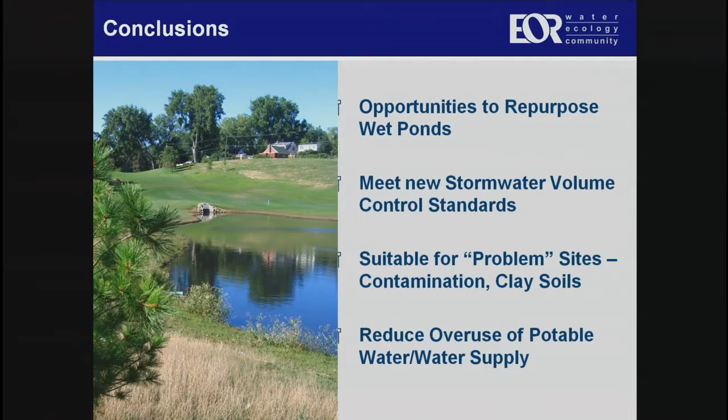We're focusing more on the stormwater benefit, but we are getting some potable water supply benefit out of this as well. In these days where we're all becoming very aware of that particular issue, this is a big benefit. As we look forward, going through literature review and doing what we did with this tool, we still think there's probably a few gaps we want to tackle, and I'd like to open it up to others to comment on this.

From a water quality standpoint, we need to think about what kind of plants are appropriate, can take the kind of urban runoff, or depending on what your source area is, what kind of water quality plant makeup makes sense. We'd like to play out this idea of nutrients a little more - the nutrients in the stormwater theoretically help support these plants. We're recapturing a very sustainable loop kind of system, recapturing those nutrients, so we'd like to better quantify those benefits.

And then also on the health risk side - this is a big issue. If you're using irrigation, depending on how open the site is to the public, you need to look at the health risks of that. That's a very new area that needs more attention. I know the Department of Health - I've been in contact with somebody at Minnesota Department of Health, and they're very actively pursuing this because nationally it's a big topic everyone's trying to tackle or is interested in. So I'm staying in touch with her to find out where we go in Minnesota and nationally.

On the plant side - I already touched on this - there's the tolerance to the amount of water. Megan mentioned that, can you find plants that let you push up your irrigation rate depending on the kind of plant you have. There's also the idea, with some preliminary support, that certain plants are higher water uptakers with higher ET, so they'll tend to dry out that soil a little quicker and optimize your system.